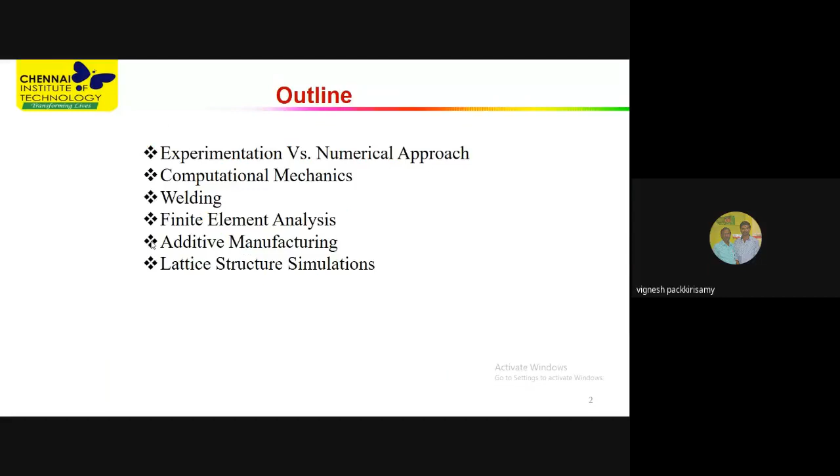Okay. So these are the objectives which will be imparted on the participants to enhance their knowledge: experimental versus numerical approach, what is computational mechanics, welding and finite element analysis, additive manufacturing, and lattice structure simulations.

So we should know what will be the role of engineers or researchers or scientists once they get into the field of work. Once they enter their job, their role may be to find out the solution for physical problems. Physical problems are nothing but the problems which arise from different areas. For example,

if you want to save your country, then defense will have some problems. If human beings need to live in society comfortably, they will have some problems. And if the industry is going to produce some materials or products, it will have some problems. So the problems coming from industry, defense or society are called physical problems.

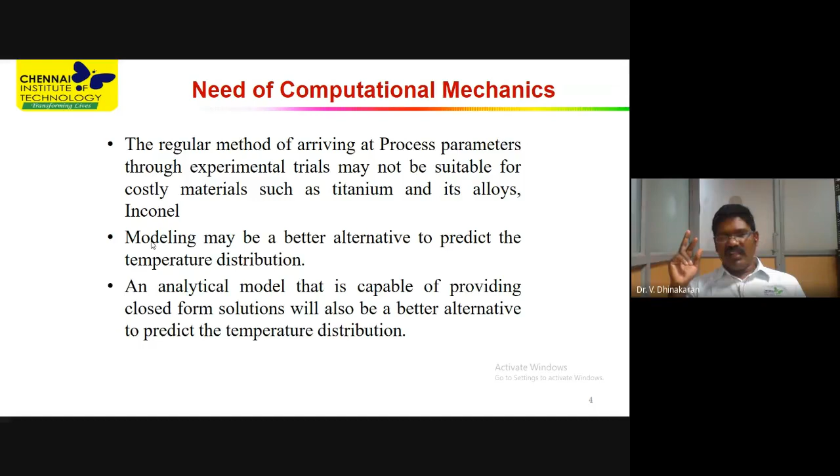So for the people doing research also, if you simply say that you are analyzing some fluid flow phenomena in ANSYS or ANSYS Fluent, the analysis solution itself is not enough to go for publications or to provide concrete solutions. It ought to be validated with analytical or experimental solutions. Then only the results of computational mechanics are believable. Hence, computational mechanics is not a substitute for experimental solution. It may be an alternate method to find the solution for physical problems.

So, what is computational mechanics? Computational mechanics is a branch of applied mechanics which uses the knowledge of computer science and mechanics. And it is generally defined as the science and practice of obtaining approximate numerical solutions using the digital computer. Using the digital computer is termed as computational mechanics.

So computational mechanics may be used to solve thermofluid problems, or used in thermodynamics, or in electrodynamics, or in welding and additive manufacturing. So it will take the particular name. If you use computational mechanics in welding, then it is called computational welding mechanics. If computational mechanics is used to solve the structural problem, then it is called computational structural mechanics. If it is used to solve the fluid dynamics problem, it is computational fluid dynamics.

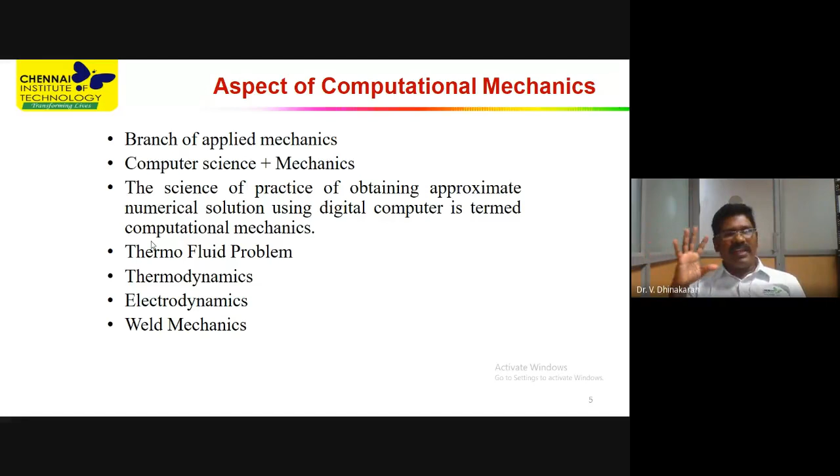If it is used to solve the thermodynamics problem, it is called computational thermomechanics. If it is used to solve the electrodynamics problem, it is called computational electromechanics. Computational mechanics is a common name. It will take the name where it is being applied, like computational electromechanics, computational thermomechanics, computational fluid mechanics. So it will take the particular name in the field of application.

So what are the steps to be followed when solving any problem using computational mechanics? As I already said, you have to convert the physical phenomena or physical system into partial differential equations. Then you have to use the physics to formulate the system. You should know how to extract the physics from the mathematical equations. By utilizing that, you need to develop a mathematical model which is the replica of the physical model.

As I said, we have a spring mass system. When you apply some force or some displacement on the mass, how the system will behave, you have to express the system in terms of mathematical equations. So it has to be done carefully. If the physical system is not properly converted into a mathematical system, then your entire work will be a waste. So it has to be carefully converted.

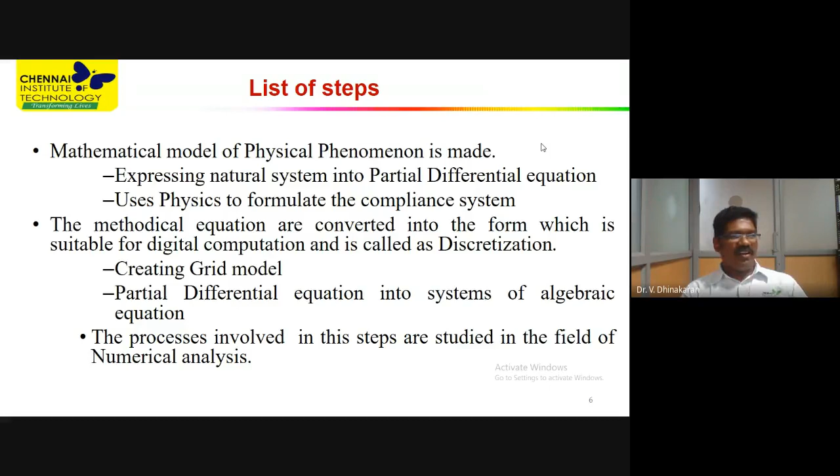So the results have to be verified, either by experimental results or analytical results or both. If both are used to validate the solution arrived from the computers, then it is well and good. Or at least one of the results should be used to find out the solution for the problems.

In these two manufacturing processes, I have planned to discuss: one is welding and one is additive manufacturing. These two manufacturing processes will show how the welding process is mimicked to take advantage of computational mechanics, and how additive manufacturing can be utilized to get the solution using the advantage of computational mechanics. So as I said, computational welding mechanics is the term used when computational mechanics is used to solve the problem of welding.

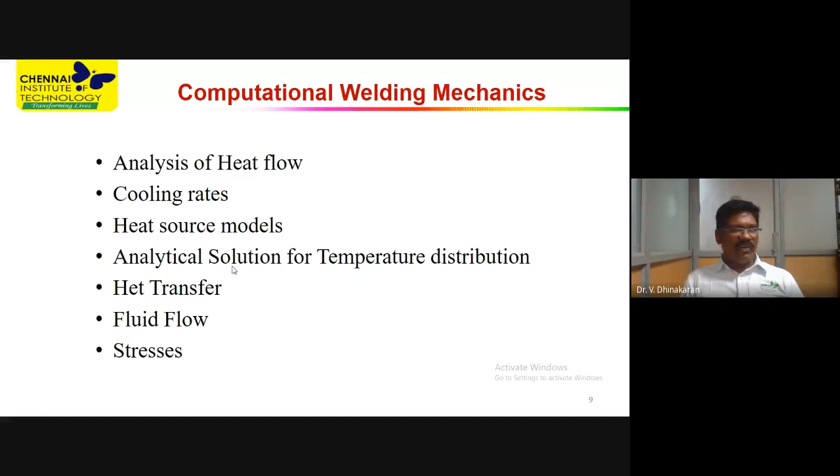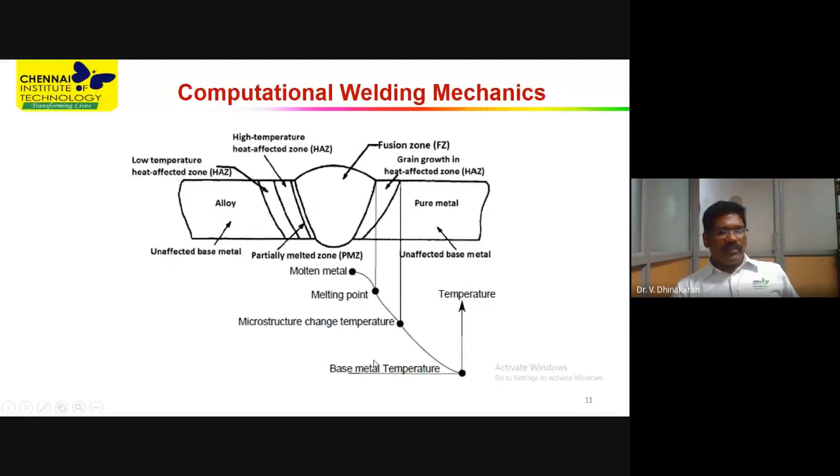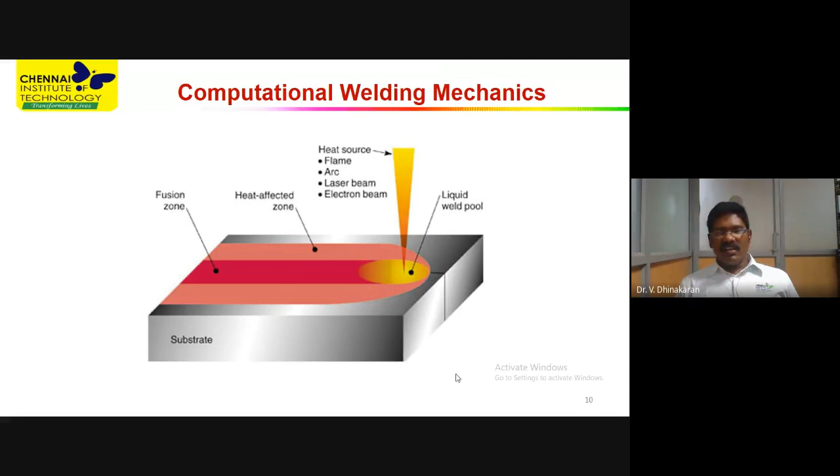So, the arc efficiency. Whatever heat is falling on the material, or coming from the power source, may not be properly utilized to melt the material. Always there will be losses. What are the losses? The losses may be due to conduction, convection, or radiation. You have to clearly understand that whatever heat comes out from the power source may not be utilized to melt the material. Always there will be losses, due to modes of heat transfer like conduction, convection, and radiation.

So in order to account for the losses, you need to bring in the efficiency. Hence, you have to use the efficiency called arc efficiency to account for the useful heat. If 100% is the total heat produced, then you have to deduct, or subtract, the losses.

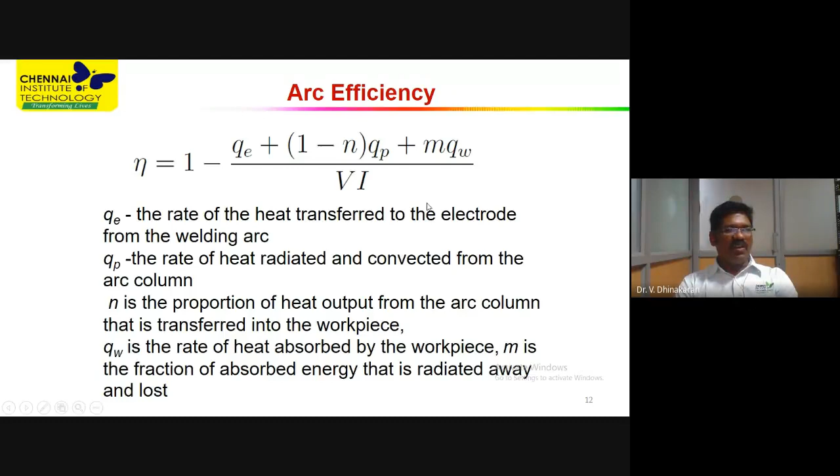Only this efficiency will be utilized to convert the molten pool, the heat absorbed by the material for converting the molten pool. This is in terms of the electrode used in welding, either consumable or non-consumable. If you use a non-consumable electrode, this is the loss. If you use a consumable electrode, that will be eliminated, and the efficiency can be calculated like this. And also there are a lot of parameters in welding.

Such as arc height, or the distance between the torch to the plates, welding current and polarity, welding speed, and gas - what gas you are using - and the diameter of electrode, and the preparation and contamination.

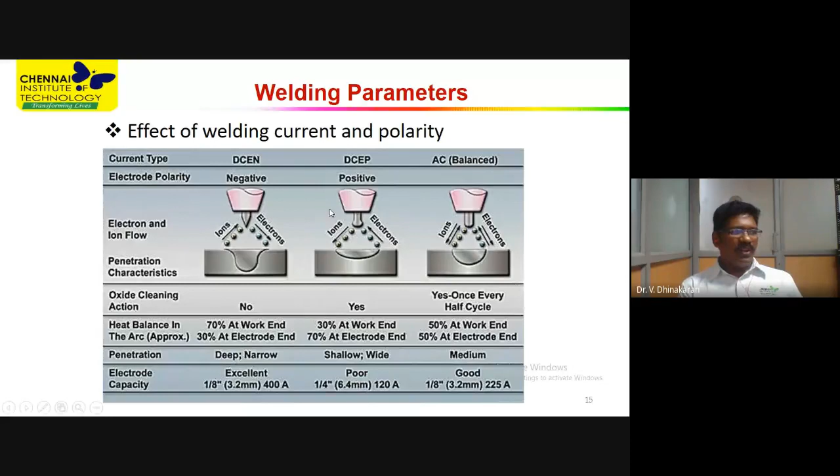When you want to have a cleaning action, like when welding aluminum material, you need the oxide cleaning action. The reason for having the oxide cleaning action is there will be some deposition of material while welding the aluminum. So in order to clean the electrode, you have to go for alternating current. Then aluminum can be welded properly. So you have to properly choose the welding current polarity during the welding process.

Effect of welding speed: welding speed plays a major role in welding. One thing you have to understand is the amount of energy will be the same, there will be no variation in this. The welding speed can be used as a variable parameter to meet our purpose. If you increase the welding speed, it will reduce the heat input. When the heat input is reduced, the heat falling on the material for a particular area will be very less.

Then the melting will happen very less. Accordingly, you will get the depth of penetration. Okay, then if you want to...

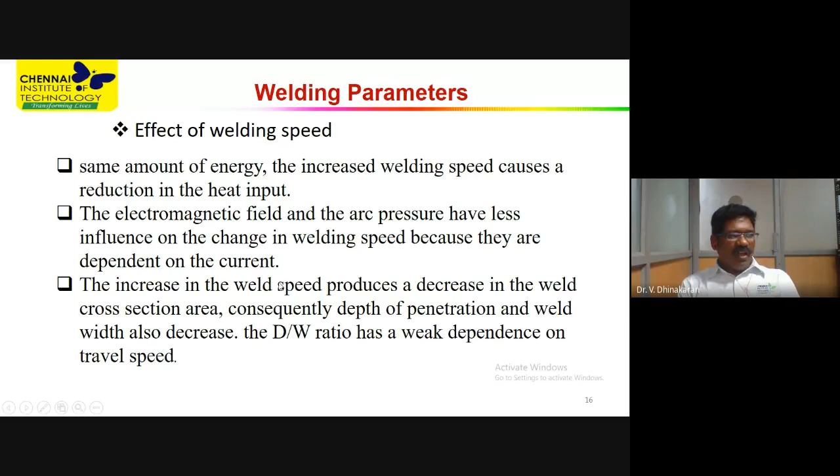If you are reducing the welding speed, the heat input falling on the particular area will be high. If the energy falling on the material is high, certainly more material will be melted and the fusion can happen properly. So the welding speed has to be chosen properly, and you need to spend a lot of time to fix these parameters, which can only be fixed upon trial and error method.

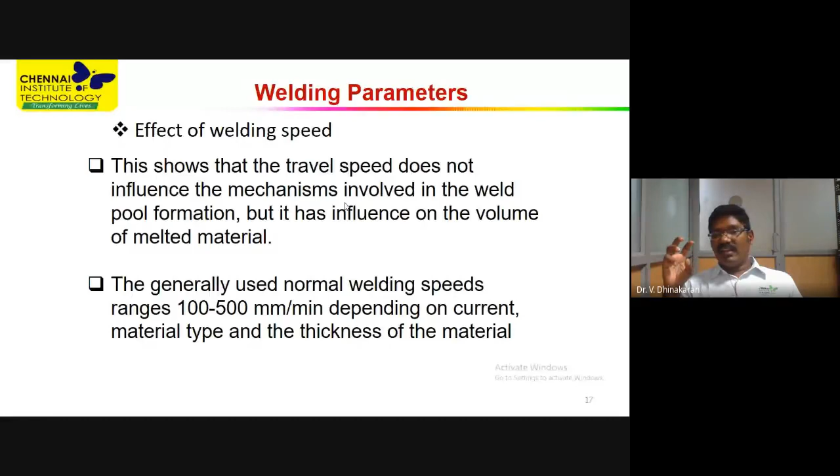Hence, this trial and error method can be effectively reduced or thrown out by using computational mechanics. Then, shielding gas.

When you use titanium, inconel, or zirconium material, it is highly reactive to the environment, so the weld pool has to be properly protected. In order to protect the weld pool in a good way, you have to create an inert atmosphere. The inert atmosphere can be produced by the utilization of shielding gas.

So the shielding gas will also have some effects. The type of shielding gas you are using to protect the molten pool, and the amount of gas you are using to protect the molten pool, also plays a major role.

As I said, the metal is locally melted. When the local metal is melted, it will be liquid. When you increase the airflow, or give a high amount of airflow, this airflow may create a turbulent action, because of which the molten pool may be disturbed. When the molten pool is disturbed, it is not a very good thing to achieve proper penetration.

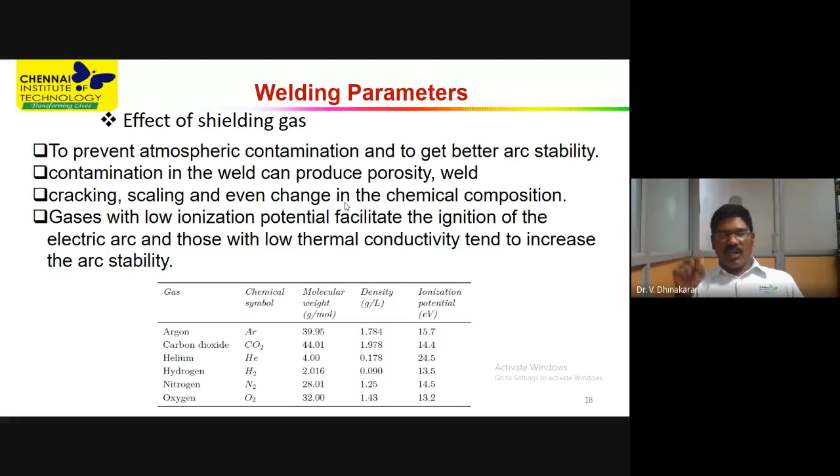Then electrode diameter and preparation. So electrode diameter, the angle: mostly commonly 30 and 120-degree angles are found to be good during welding, based on previous experimental trials and published literature. So the depth-width ratio and penetration can be fixed or decided by carefully choosing the electrode diameter also.

So these are the parameters which need to be decided upon by a trial and error method, for which you need to spend a lot of time and energy if you do not follow computational mechanics.

So a lot of forces are coming into effect: electromagnetic force, Lorentz force, Marangoni effect, and arc pressure too. So a lot of physical phenomena are getting involved in the welding process, making it a multi-physics problem.

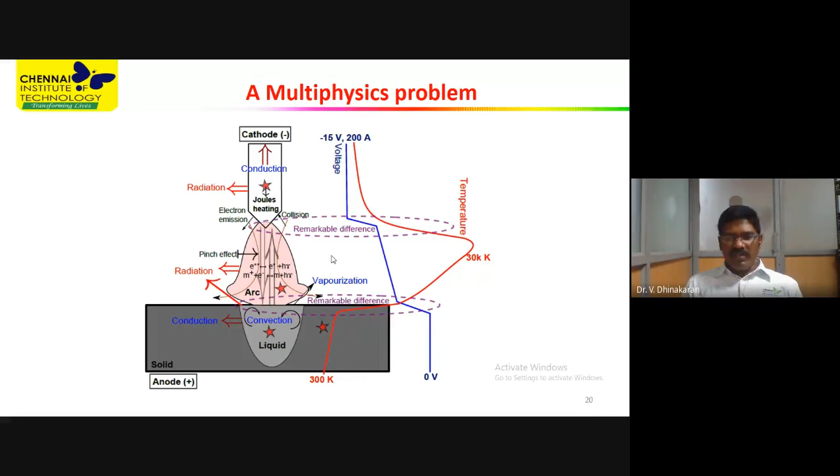It involves thermal analysis, it involves mechanical analysis, it involves metallurgy, it involves fluid dynamics problems. So all the phenomena have to be considered properly to properly solve the problems.

The microstructure may be altered if you are not properly choosing the parameters. Metallurgical effects may not be proper, and the strength of the weld may not be good if the proper parameters are not chosen, and if the fluid problems, the molten pool disturbance, and the stress measurements, residual stress, are not considered.

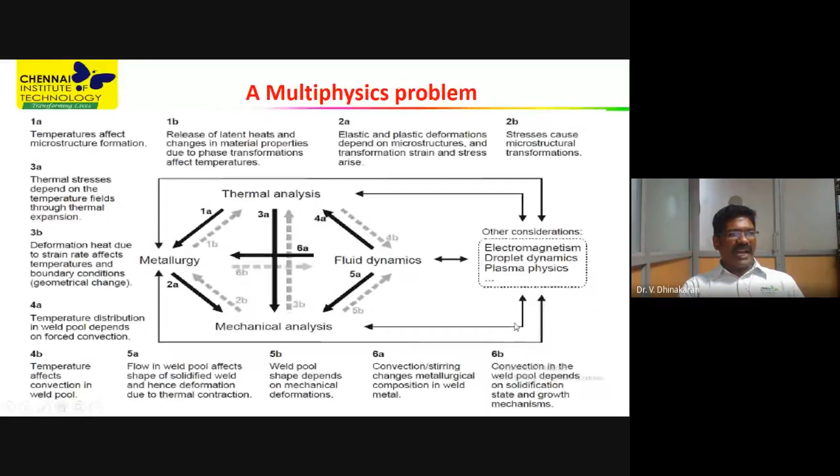So thermal analysis means the heat transfer has to be properly analyzed. How the losses are happening also has to be studied while analyzing the welding problem. So hence welding is a very big multi-physics problem, and all the concepts have to be properly understood before converting the physical system to a mathematical system.

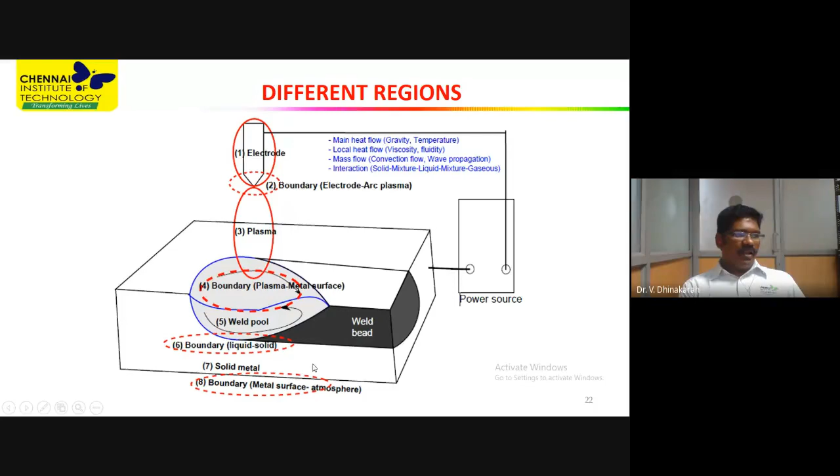Okay, so different regions, how the forces are being effective in the welding. So how will the structure of the weld pool be? Okay, as I said, it's a local weld pool. So it will move in this way; the heat source will move in this way.

As a weld pool, as I said, it will have the Marangoni force. It will have Lorentz force. It will have buoyancy effect. The arc pressure will be influencing the molten pool. The aerodynamic drag force will also be influencing the molten pool, and the laser losses, radiation from the plasma. Okay, so all the losses will also be coming into effect, and these are the things that will be designing the structure of the weld.

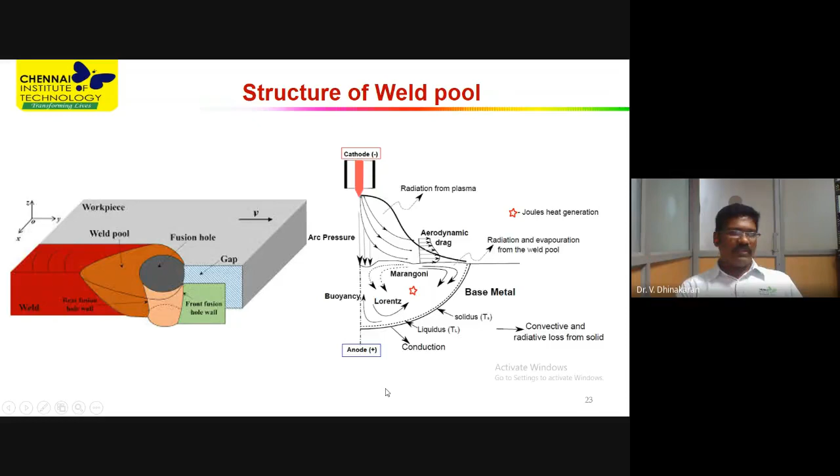So, what are the specific issues during welding? During welding, a fusion zone will be formed. Flow will take place inside liquids, and fusion zones will be solidifying. So the time steps have to be adapted to handle the phase change properly. I told you physically, when heat is falling on the material, it will be conducted. But when it needs to be expressed in terms of a mathematical equation, how the heat is conducted in the material has to be mimicked. And when the computer solves the problem, the time steps have to be properly defined to take care of what happens in the physical process.

So in the physical process, we have thermal conductivity, the ability of the material to conduct heat, in watt per meter Kelvin. Apart from thermal conductivity, there is alpha. Alpha is the thermal diffusivity. How fast the heat is penetrating the material is defined by alpha. This ability is understood by the physical process, but to impart it in the numerical simulation, the time step will play a major role. So the time step has to be properly defined while solving the problem.

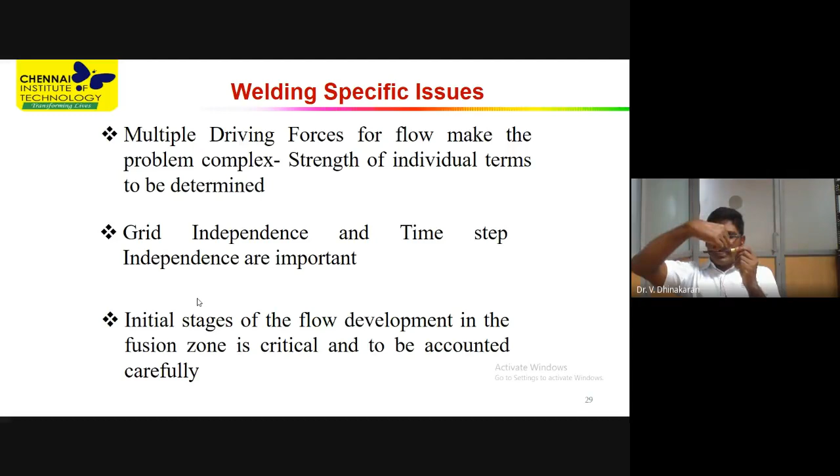The heat transfer is more dominant for the particular area around this portion than the ends. Okay, so let me make you clearly understand. I am applying heat here. The applied heat may highly influence certain portions more than the far away ends.

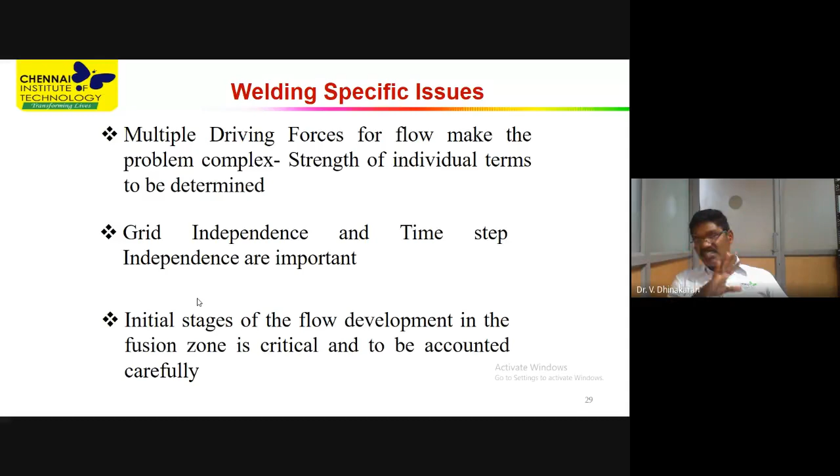Then the area where the heat will be highly influencing will be having more meshes than the area where it does not have influence. Okay, so this is called meshing.

Then what is grid independence and time independence studies? That means when you change the mesh size, the solution will not vary. You have to come to a point where the solution will not vary even if you change the mesh size. So that study is called grid independence study. So that has to be ensured here.

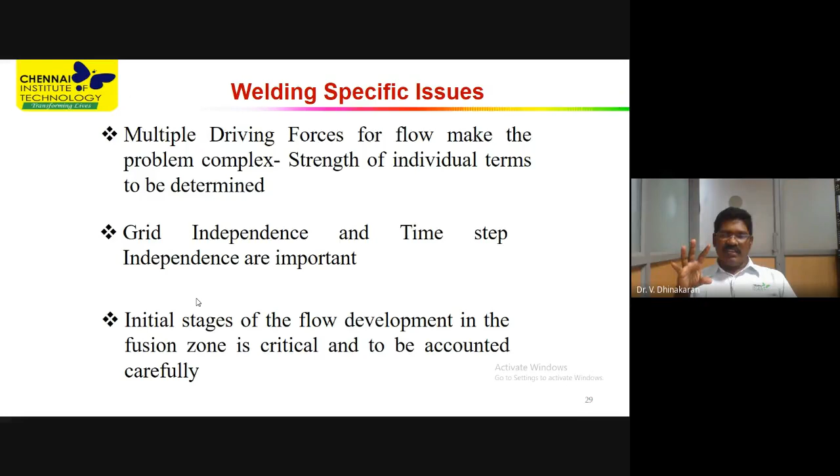Then conservation equations. I said three: conservation of mass, momentum, and energy. These are the important conservation equations. The conservation equations are already existing. Already the scientists have found out conservation of mass, momentum, energy; they are available in the textbooks, available in the literature. Then what is your role? What are you going to do?

So the given equation, conservation of momentum: rho into dou V by dou t plus V bar dot del V, minus del pressure, and mu del squared V plus the source term. This is velocity, this is pressure, rho is density, and this one term is called source term. This is called transient, this is convective, this is pressure gradient, this is the diffusion term, and this is called source.

So this equation is available in the software and in the textbooks. What you are going to do while you use this equation in computational mechanics is alter this SU. The source term can be altered based on your physics. This equation is available in the software, and this SU can be defined as a user-defined function in the software by you, and the problem can be solved by any analyzing software.

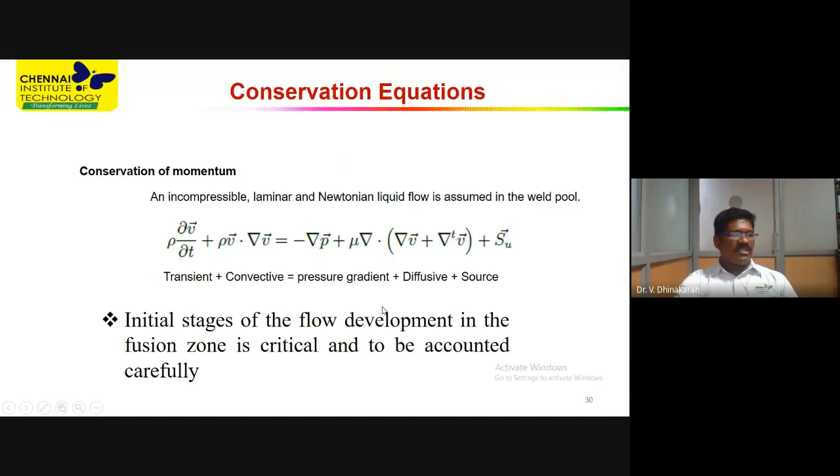So I told the governing equations for fluid flow. This is the same equation; I have expanded it here in the x, y, and z directions with the source term. The SU has to be defined based on the conditions. If you include the pressure gradient, you have to replace the SU by minus dou p by dou x. If you want to include the body force, you have to replace the SU with these equations.

If you want to have the porosity formulation for phase change, you have to replace this SU with this one. Let me clearly mention this equation is already available in the software. The only thing is you should know how to make use of other parameters, other equations, or other physics to replace this SU.

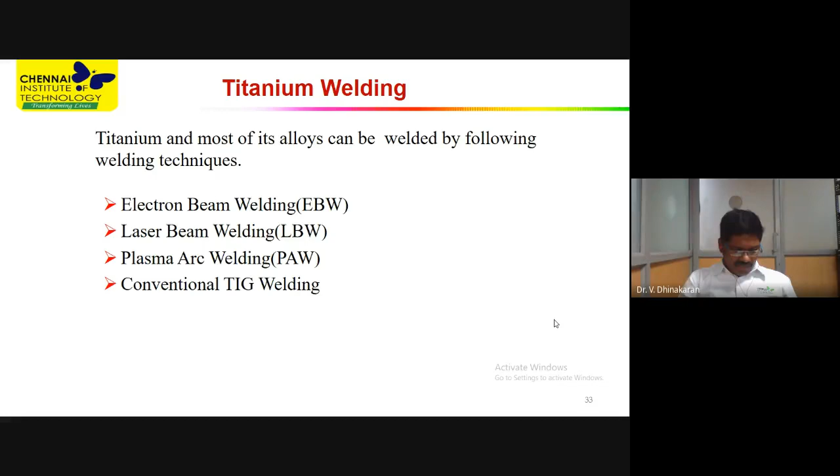So I have tried to weld titanium. So what are the difficulties, and what are the standard methods used to weld titanium? Electron beam welding, laser beam welding, then plasma arc welding and conventional welding. These are the methods being used in titanium welding.

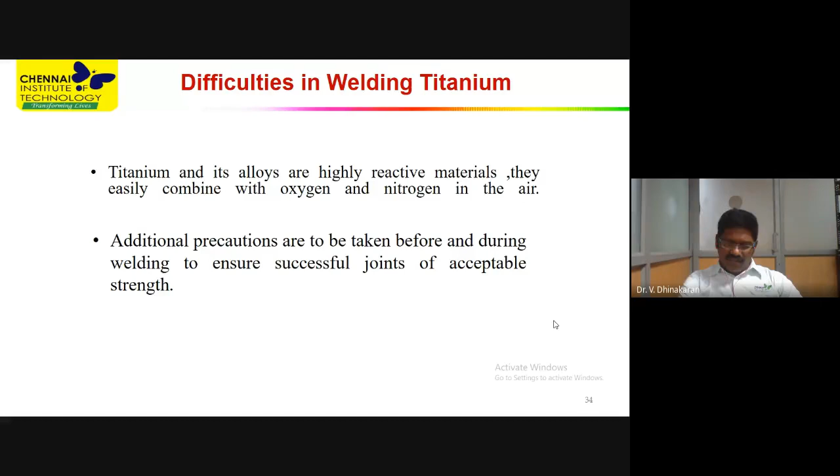What are the difficulties? Titanium is a highly reactive material, and it can easily combine with nitrogen and oxygen. Hence, the precautions have to be carefully considered during the welding process. So plasma arc welding. It's a plasma arc power source. The workpiece acts as positive, and the electrode acts as negative. So DCEN, direct current electrode negative, is mostly used in the plasma arc welding process, and the heat will be flowing from the torch to the workpiece.

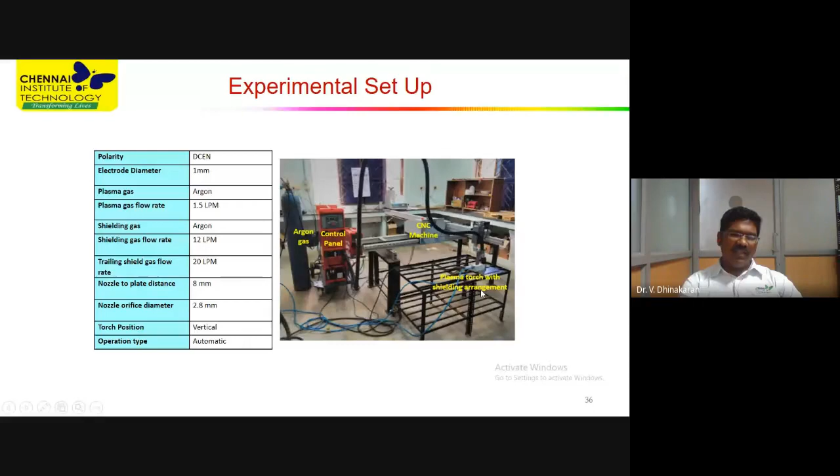So the experimental setup, which is available in the National Institute of Technology, Tiruchirappalli, has been utilized to conduct my experiments. And these are the welding parameters which have been used to conduct the physical trials. So I told the molten pool has to be properly protected. If it is not properly protected, it will react with the environment, and that will not produce a sound weld. Hence, a trailing shield has been designed.

It's a new trailing shield which is going to be patented soon. This new trailing shield was developed in our lab with the help of my guide, Dr. Shivashanmugam and Dr. Sankaranarayanasamy, and my co-researchers like Dr. Karpagaraj and Dr. Stephen. So we have developed this new trailing shield, which is going to be patented soon. And this new trailing shield has been effective to produce a very good sound bead.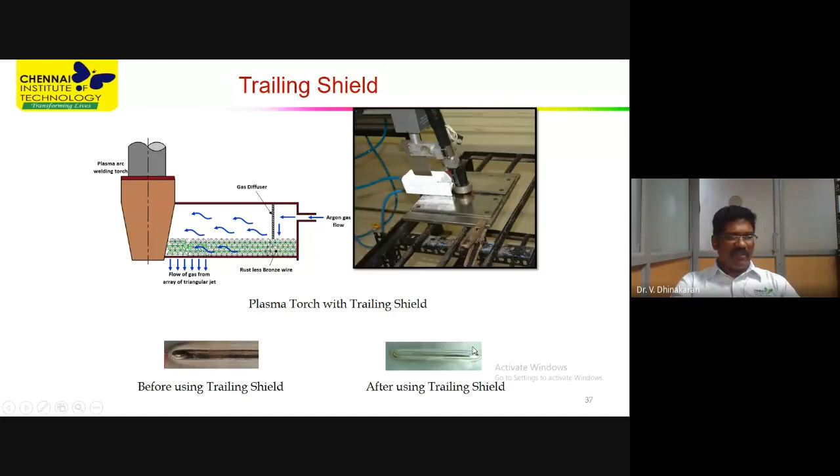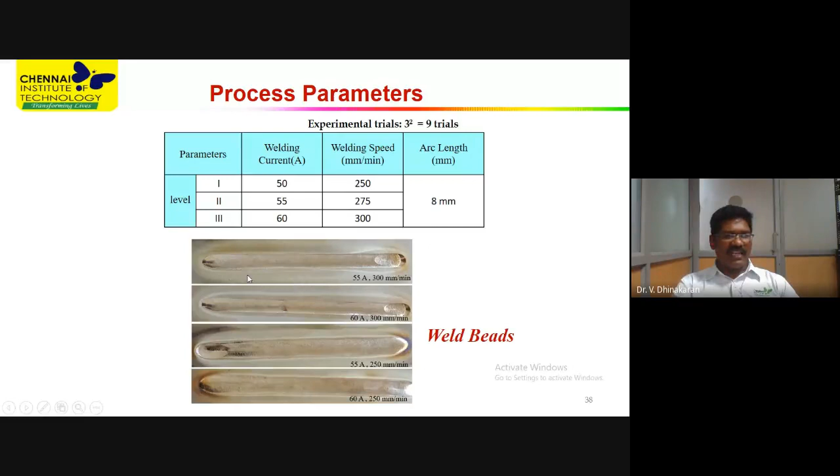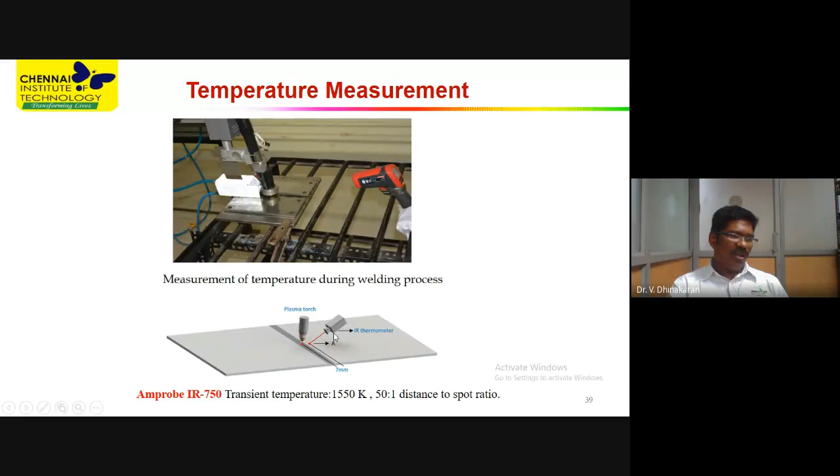So we have chosen 3 parameters: welding current, welding speed, and arc length, which has been fixed at 8 mm. So 50, 55, 60 amps current has been chosen, and 250, 275, 300 mm per minute welding speed have been chosen, and these are the weld beads obtained through the welding process. During the welding, the temperature has also been measured. You cannot measure the temperature at the weld pool, because it will be very high. So we have chosen around 7 mm from the center of the weld pool, and we have used an IR thermometer to measure the temperature.

So after welding, we have cut the specimens and we have seen the penetration of the welding. Then we found that 60 amps current and 250 mm per minute welding speed yielded a full depth of penetration. Hence, that parameter has been chosen for creating the butt weld joint. Then we have measured the stress by using the hole drilling method.

So how these stresses are produced in welding is, when the metal is heated, the molecules will try to move, because according to the kinetic theory of gases, when something is heated, the molecules get some extra energy and will try to move away, or run faster. Say this is the weld pool; when molecules are heated, they will have more energy and try to escape, and after some distance, the molecules there may not be feeling the heat, and they are not moving away.

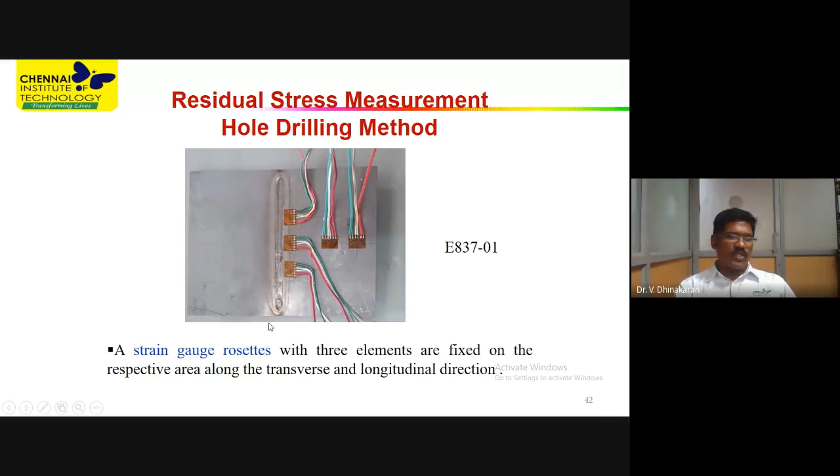So this moving particle will try to push the molecules which are stationary. Then there will be a fight between the moving particles and the stationary molecules. Because of that, a stress will exist. That stress is called thermal stress. So we have measured the thermal stress also. Then the distortion. If you look at the figure, on one side you are able to see the distortion.

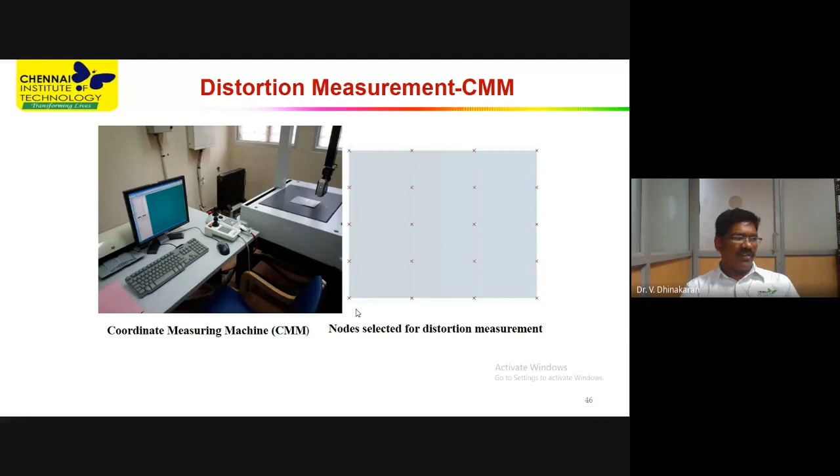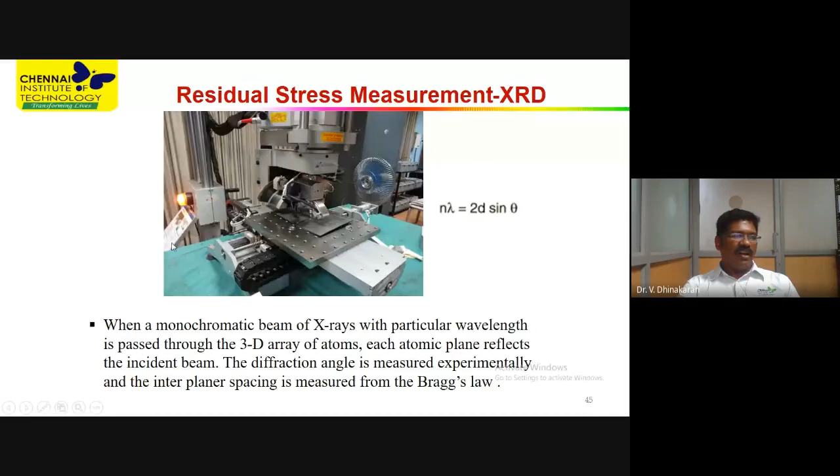The distortion also has been measured using the CMM machine, which is available in the Defence Research and Development Organisation in Bangalore, GTRE, Gas Turbine Research Establishment. This is also a very costly machine. The XRD residual stress measurement equipment uses Bragg's law to find out the stress in the particular component. This is also available in the GTRE DRDO lab in Bangalore.

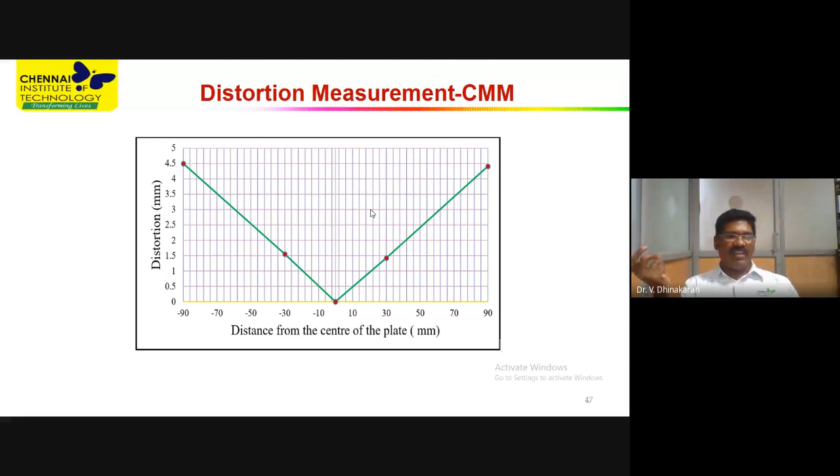So now we have understood the physical process. And for computation, the physical process has to be converted into a governing equation. So in welding, heat is involved. Then how will the heat be flowing into the material? That has to be described. Heat is coming and flowing into the material, and what shape will the heat take going into the material? That has to be predicted properly.

So the model which explains the flow of heat into the material is called the heat source model. The heat source model has to be carefully chosen. Already available heat source models, the double ellipsoid heat source model, the conical Gaussian heat source model, and the modified heat source model, are available in the literature for welding. So this uses the equation.

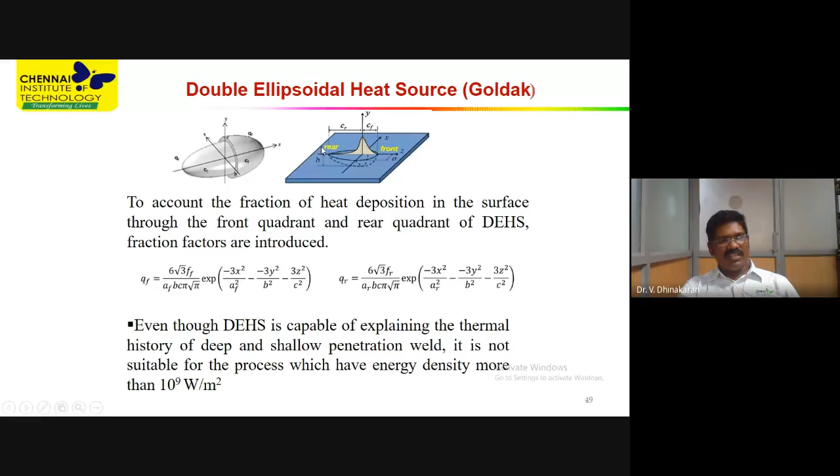The double ellipsoid heat source model is like this. Goldak said that the heat is flowing into the material in the form of two ellipsoids, and the equations are like this. And C.S. Wu, who is a professor in China, said that the heat is flowing like a cone into the material.

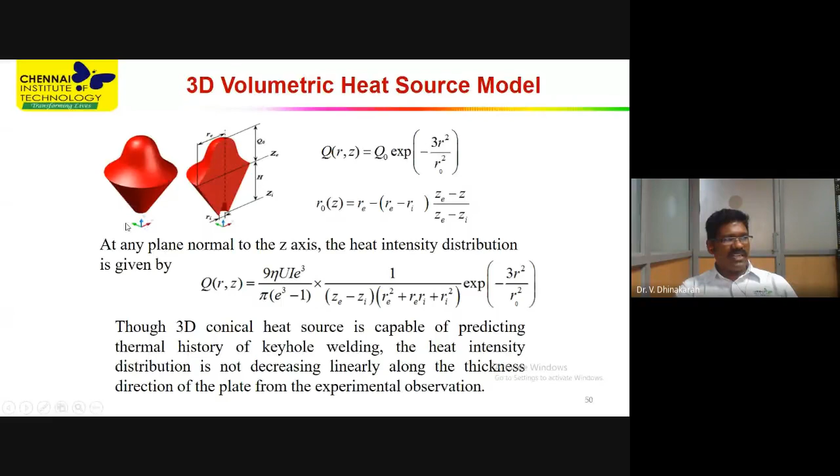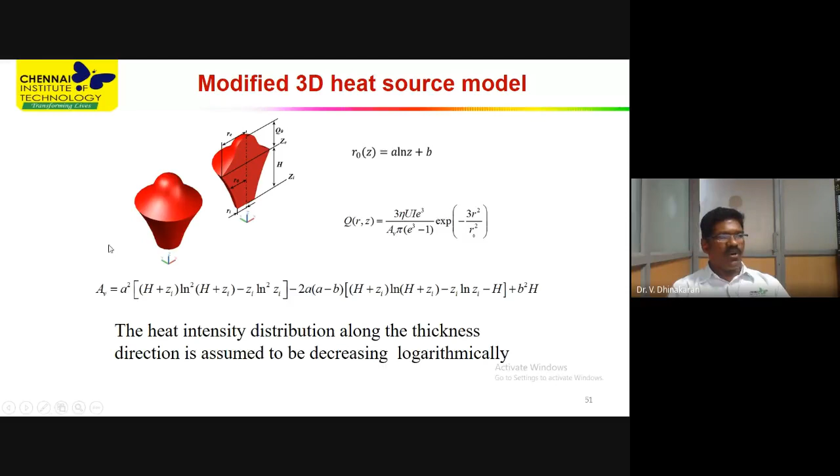And another person modified the heat source model, and he said that it will not go like a cone; it will go like a truncated cone into the material. Then, in our research, we found that the weld pool shape is neither a cone nor double ellipsoidal. We found that it is like a parabola.

Then we developed a new heat source model by using a parabolic Gaussian heat source. A parabolic Gaussian distribution has been utilized to develop the heat source model, and this is the distribution parameter: R naught of z is equal to a z square plus b.

We assumed this distribution parameter equation, and upon solving it at the top and bottom, we found the constants a and b. See, this is a parabola. The parabolic distribution has been used to mimic the physical system, and I am converting the physical system into a mathematical equation.

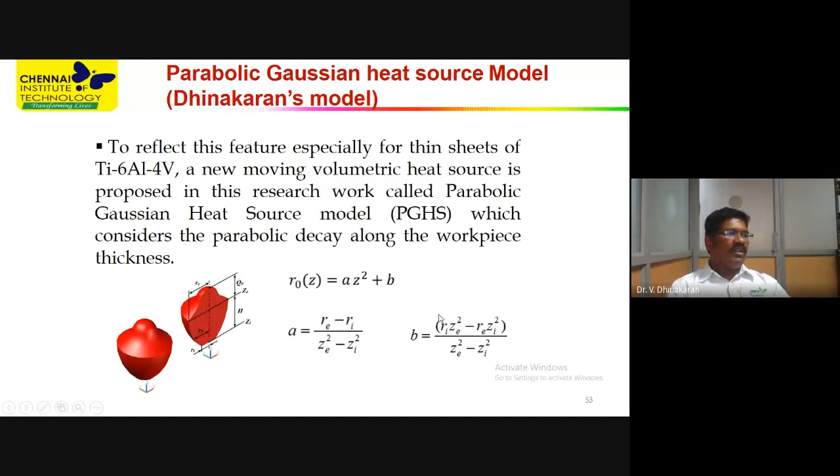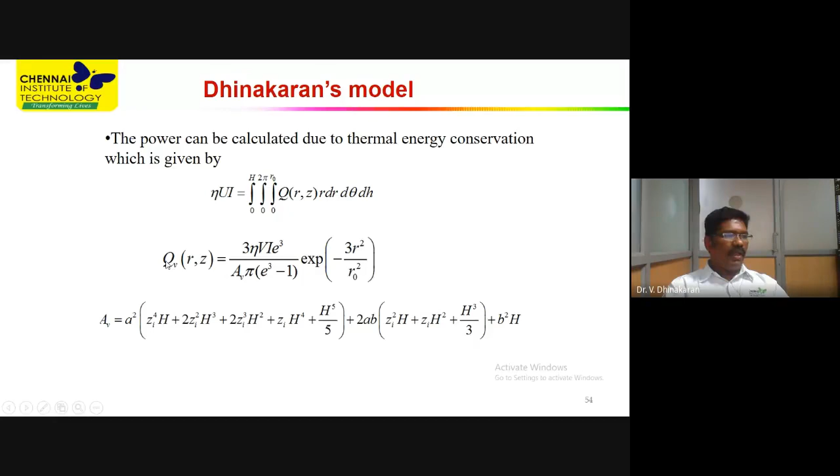So I developed a mathematical model called Dhinakaran's model. It has been published in my name and is available in the literature. The Dhinakaran's model has been derived by using the triple integral, and these are the equations we developed to represent the Dhinakaran heat source model, where QV is represented by this equation. So this is the heat source model, which will be the replica of the physical process.

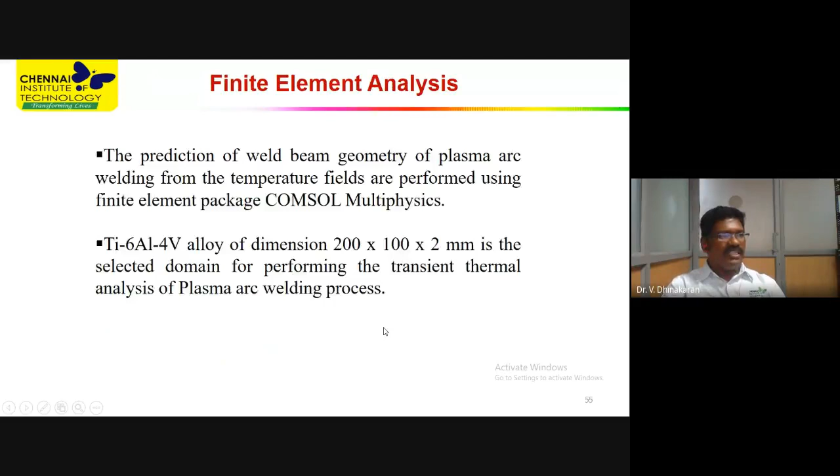We use COMSOL Multiphysics, one of the finite element software, to solve the equations. As I told you earlier, this equation is available in all the analysis software. The only thing is the source term. Here QV is the source term, and it is going to be replaced by this equation, which has been solved by the COMSOL Multiphysics software.

And I want to substitute the boundary conditions. The equation has to be solved by using boundary conditions, so we have used boundary conditions to define the losses. It's a natural boundary condition. These are the essential boundary conditions to solve the equations.

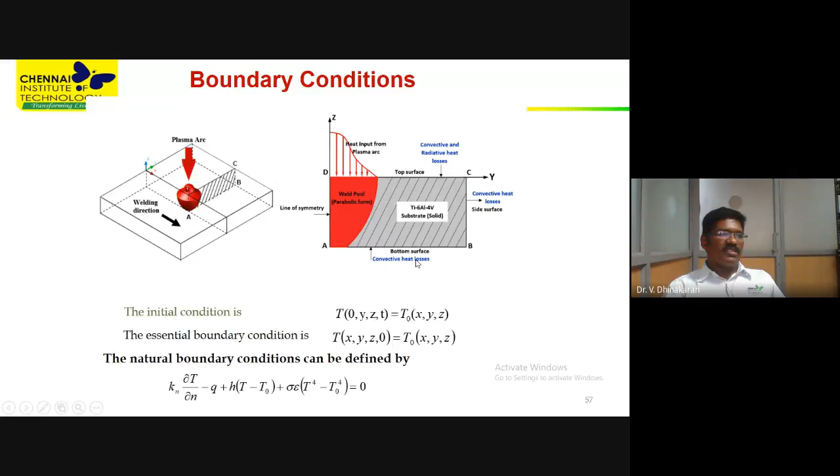And we have developed a new heat transfer coefficient. We found the Nusselt number correlation from the standard data book, derived the Reynolds number and Prandtl number, and from the Nusselt number we found a new heat transfer coefficient. The heat transfer coefficient h is in watt per meter square Kelvin, and the thermal conductivity is in watt per meter Kelvin.

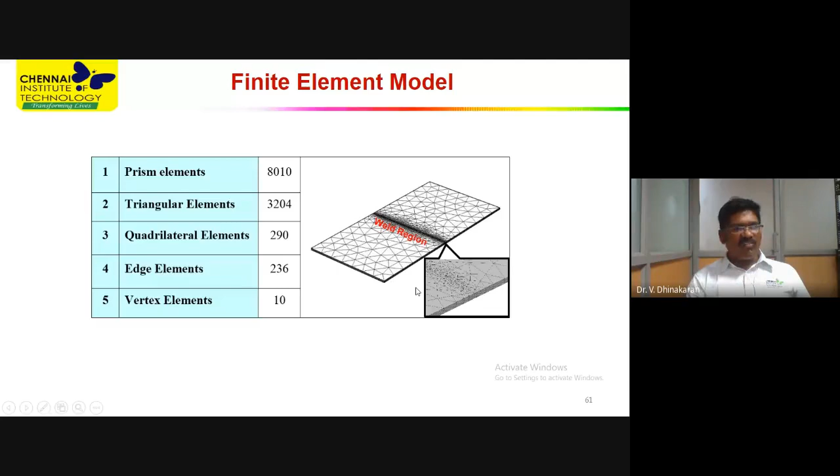When you move away from this center, there will be not much more influence of the gradients. Hence, coarse mesh has been chosen far away from the center, and 6 centimeters from the center on either side has been chosen with the fine mesh. So what will happen if the mesh sizes are uniform everywhere? There will be a lot of computational time, which will waste our physical processing time.

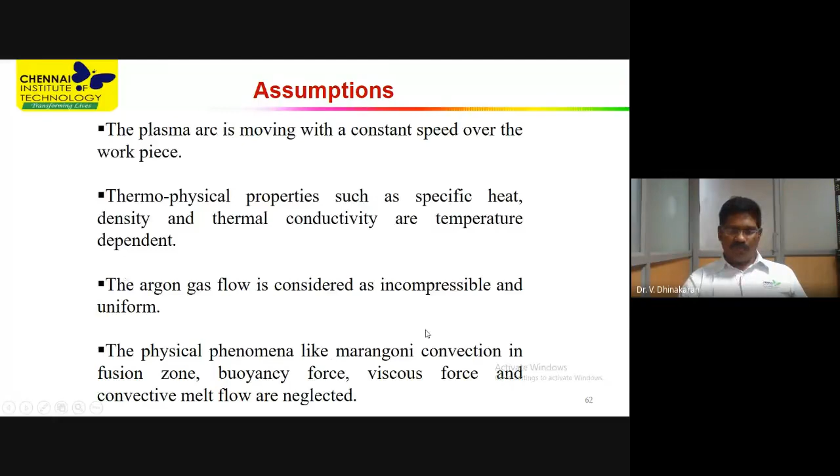So assumptions have to be considered. I consider temperature-dependent thermal properties, and the argon gas flow is considered as incompressible and uniform flow. The temperature distribution has been calculated using the already available heat source models: the three-dimensional conical heat source model, the modified three-dimensional heat source model, and Dhinakaran's model. These three heat source equations have been utilized to find the temperature distribution, and it is found that Dhinakaran's model predicts the temperature distribution more correctly than the other two models.

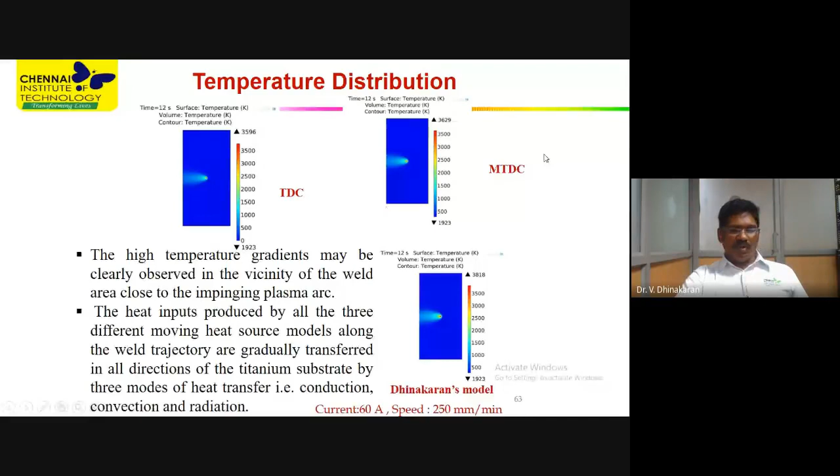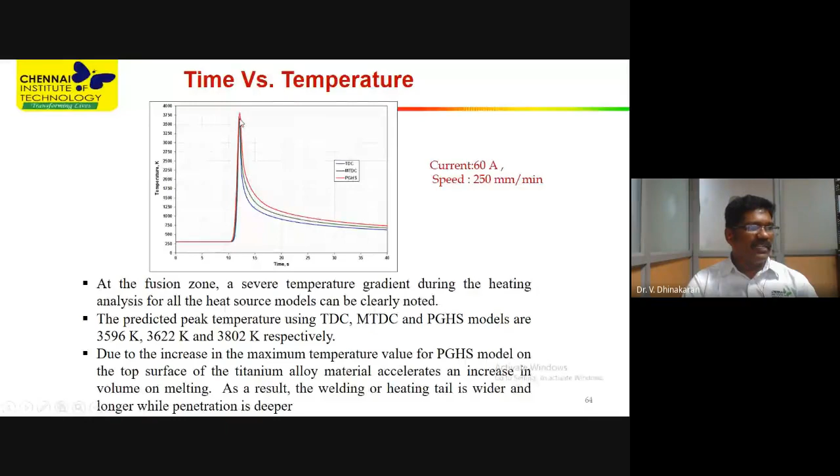And the temperature, see, there is a last one, PGHS. So this is the peak temperature measured using these three heat source models, and it is found that Dhinakaran's model is correctly predicting the temperature. So this is the welding pool predicted by the three different heat source models. This is the physical welding pool from the experiments, and the physical welding pool measured from the experiment is correctly predicted by Dhinakaran's model. Okay.

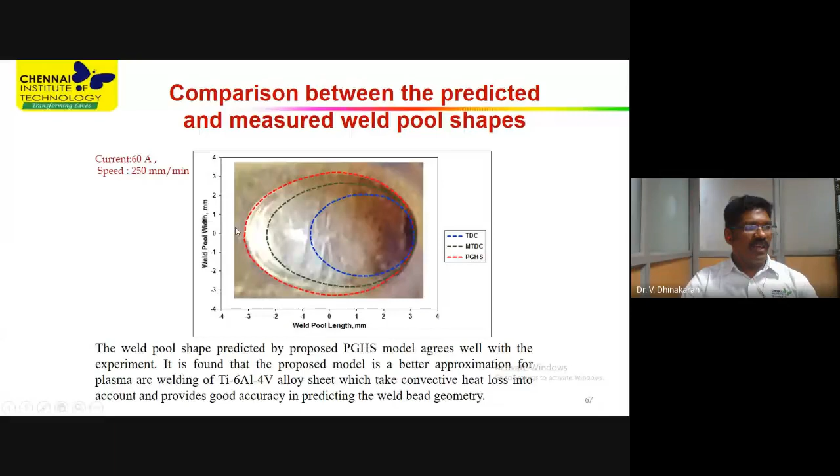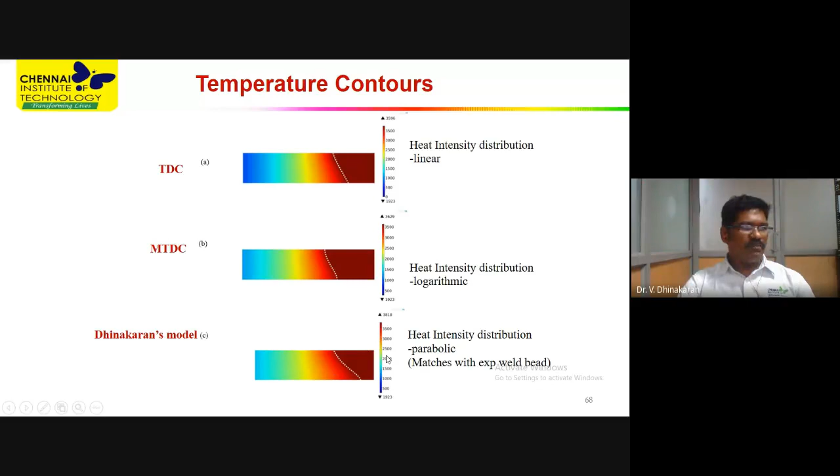So on the temperature contours, the parabolic fashion has been arrived at by computational mechanics using Dhinakaran's model rather than the other two. And the temperature distribution predicted by Dhinakaran's model, see, the temperature is getting constant only when it reaches the quasi-static process, and the temperature is maintained constantly, but when the heat source reaches the end of the plate, the temperature is suddenly rising.

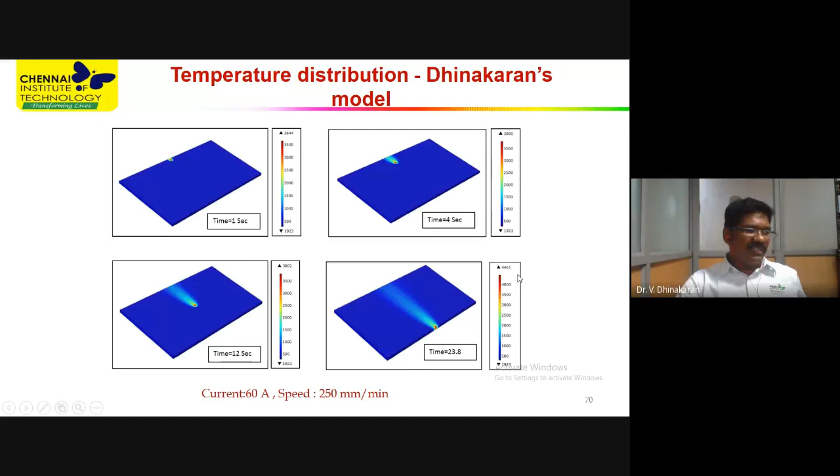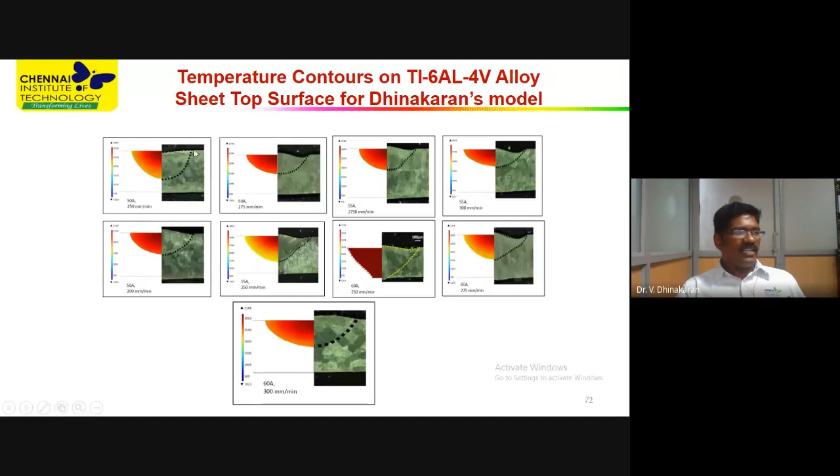The reason for the sudden increase of temperature is that while the heat source is here, it will have area normal to the surface for heat transfer, but here there will be no further area for heat transfer. Hence, the temperature is suddenly rising from the constant to a certain extent. So this is the experimental macrograph obtained from the experiments, and these are the macro profiles predicted from computational mechanics, and both are almost matching.

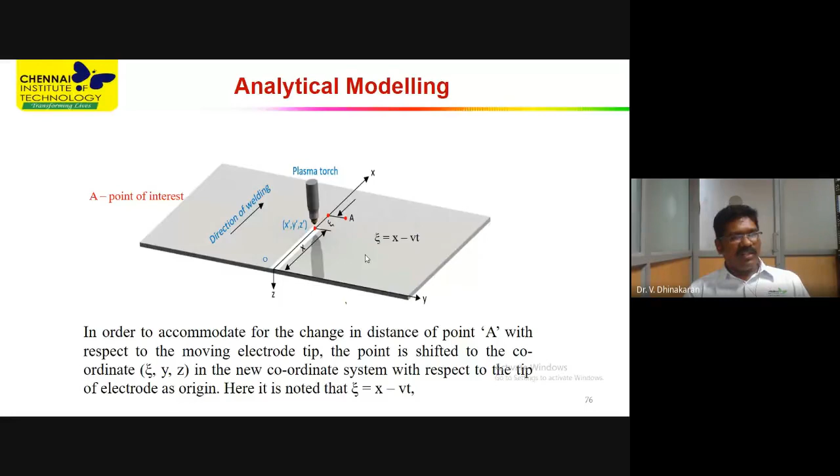And we have predicted the stress measurements and angular distortion. The distortion is also predicted using Dhinakaran's model. So, analytical modeling. We have developed an analytical equation.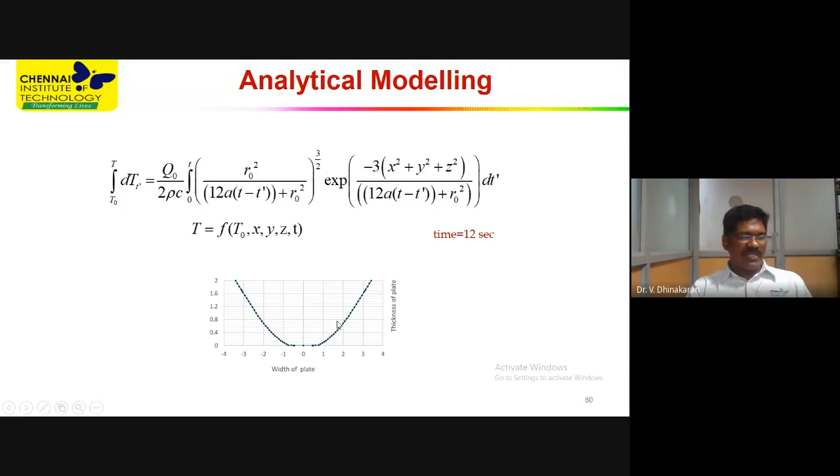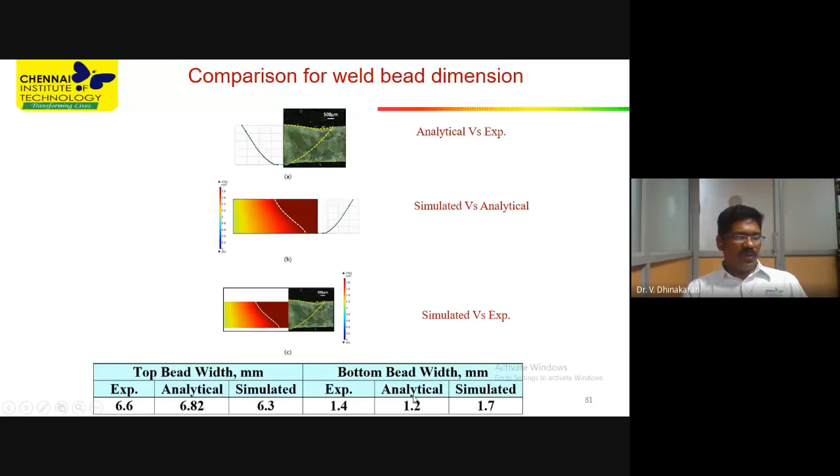See, the temperature is predicted. This is one plate, and this is another plate. The temperature is predicted just as we predicted from the simulation, so we are correctly able to get this. In the experiment, the top bead width is 6.6 mm, analytically we found 6.82, and simulated we found 6.3. The bottom width is found at 1.4 through experimentation, calculated as 1.2 and simulated as 1.7.

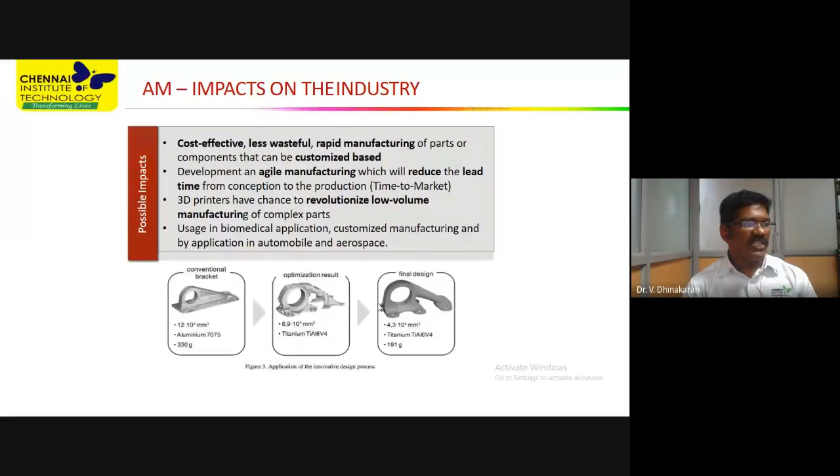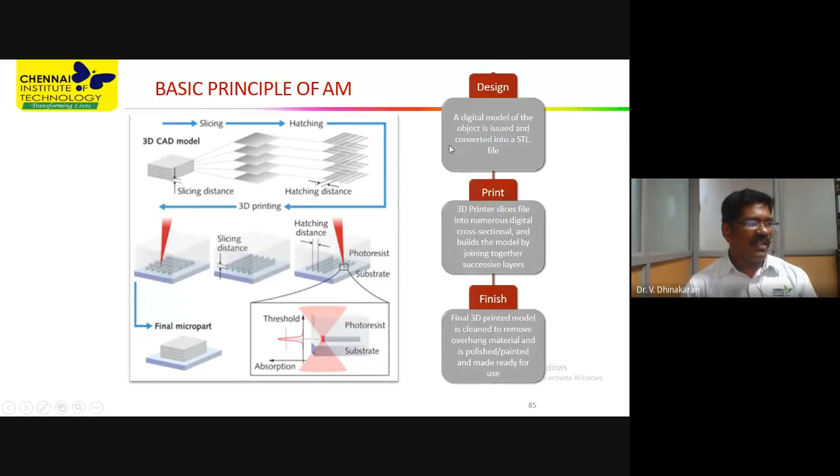I'll just go through additive manufacturing. Additive manufacturing is a very cost-effective, less wastage and rapid development process. In it, the 3D model will be developed, the 3D model will be sliced, and layer by layer the material is added to generate the components. There are different technologies, used in the automotive industry, aerospace industry, consumer, medical, industrial, and research.

And there are different processes: the SLA process, laser melting, fused deposition modeling, CLIP. Polymers, metals and alloys, powders, thermoplastics, ceramics and glass materials are being utilized to produce particular components through additive manufacturing.

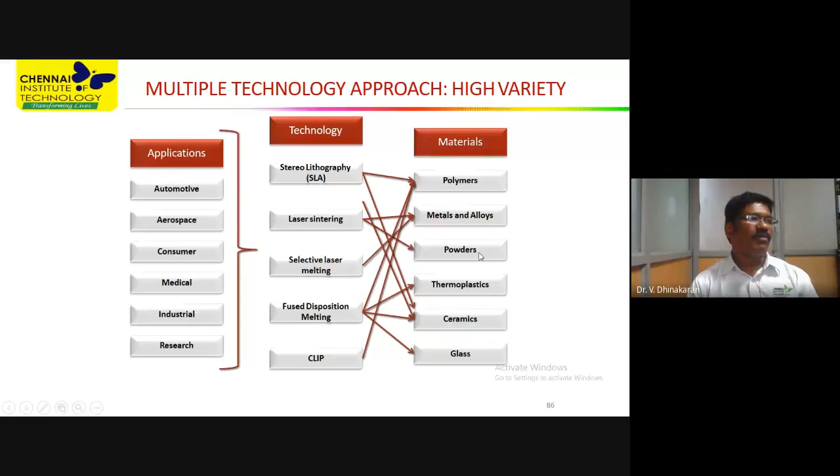I am skipping ahead because of time constraints. The limitations of additive manufacturing are strength, surface finish, speed, and cost. These are the limitations of additive manufacturing methods.

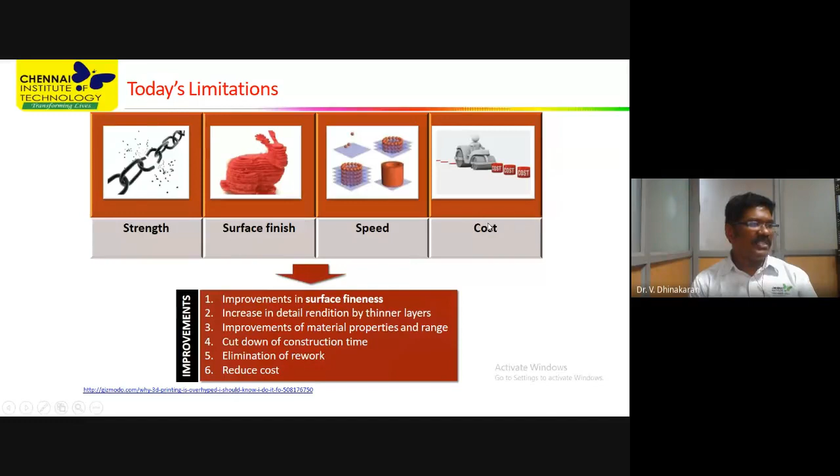It's an SL method, and it uses photopolymerization. This is the photopolymerization process, and the material is produced this way.

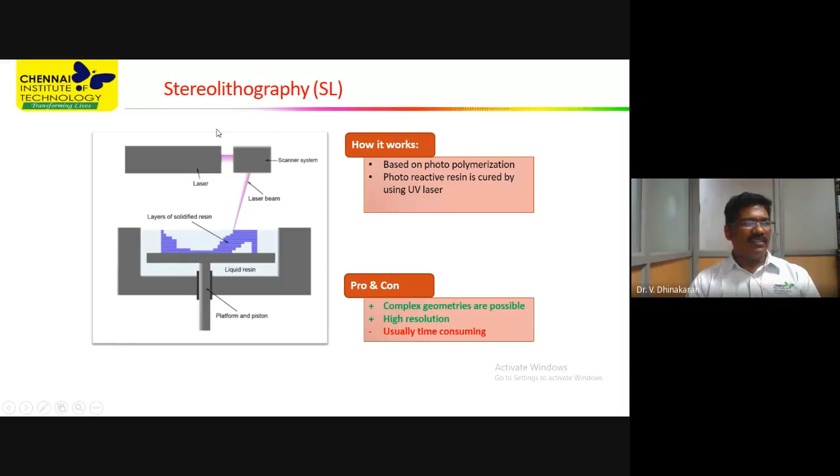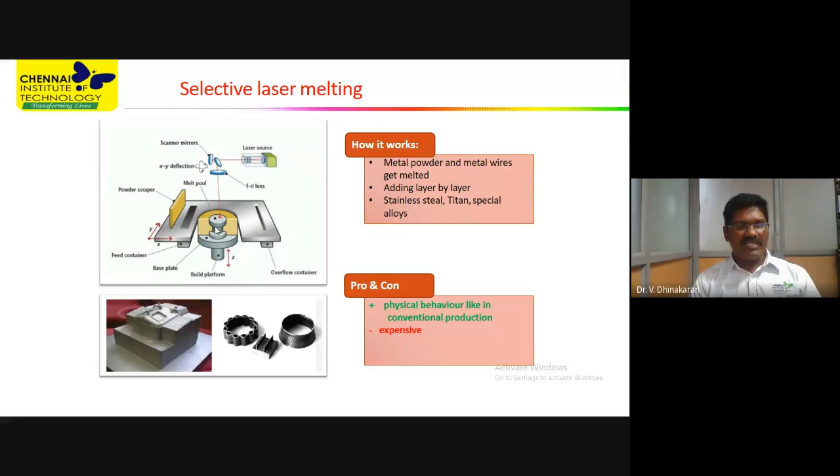In selective laser melting, the material gets melted, and layer by layer the material is ordered, generating the required shape.

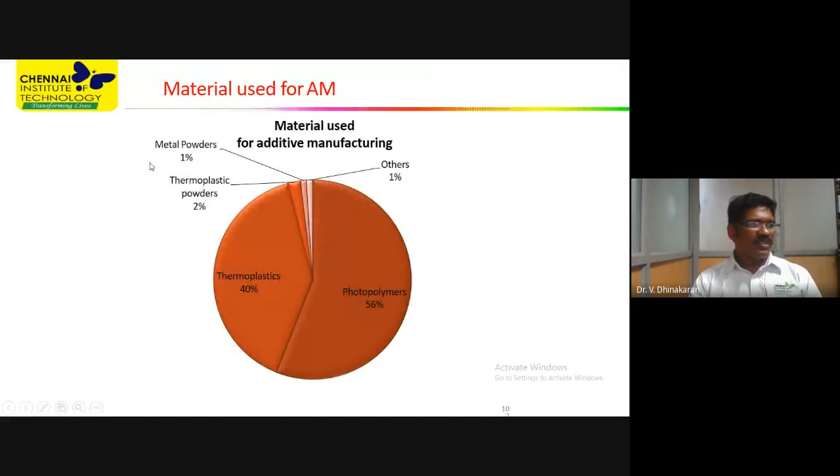Now we can see the material used, and this shows the distribution of material being used in additive manufacturing.

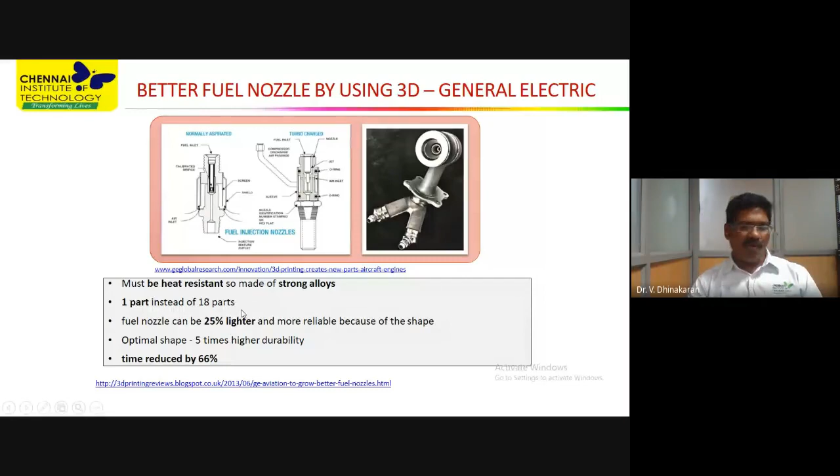Lattice structure is one of the very good areas being looked into. Instead of using bulk material, you can go for a lattice structure or lattice sections.

The lattice structure can be tested to see whether it will be able to produce strength on par with bulk materials or not. That can be designed and we can go for testing.

We used ANSYS and Abaqus to get results for a solid cube of material, and we found the deformation through ANSYS and Abaqus.

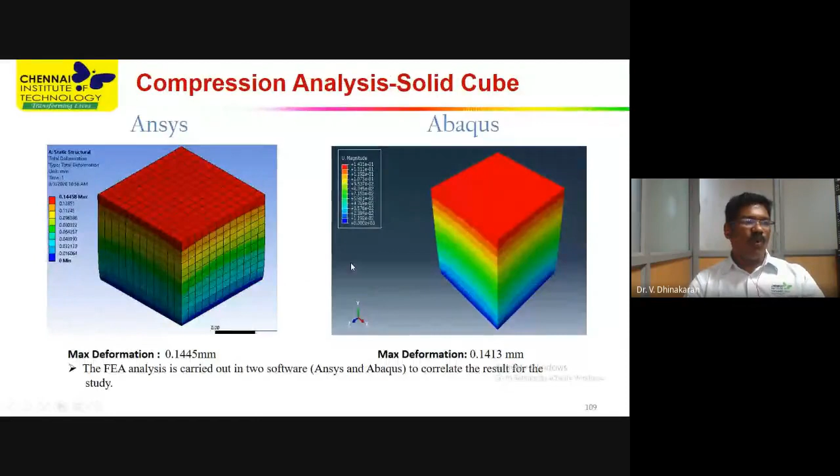The deformation has been analyzed, and the deformations are coherent with that of the solid one. So by using this approach, you can avoid a lot of external trials.

So that's really the success of this approach. Thank you. I can take up any questions if there are any. Sorry, I have taken more time.

No problem. Because of time concerns, I skipped over what additive manufacturing itself is—that would take another 1.5 hours, so I covered that topic briefly. We will take that topic up on another day. Okay sir, thank you, Professor, thank you sir.